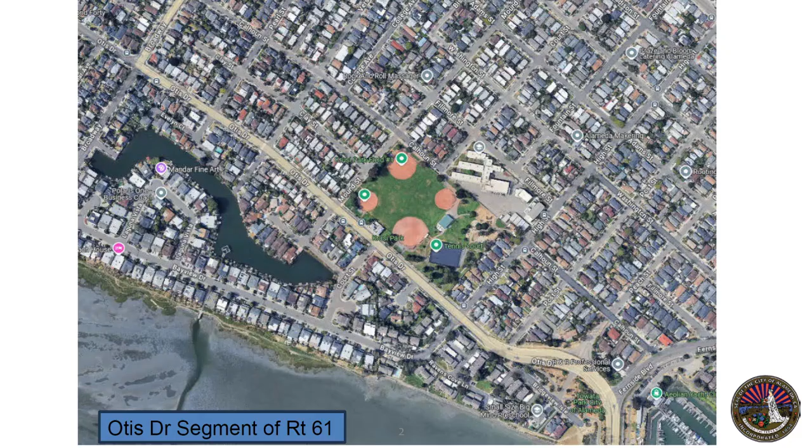It's a 4-lane roadway with uncontrolled crossings at key pedestrian and bicyclist access points. In the city of Alameda street classifications, it is a neighborhood connector, like an arterial. It's a transit route and a truck route. Caltrans found with their study that it has very high auto volumes, higher than other neighborhood connector streets in Alameda. It's a high injury corridor in the City of Alameda Vision Zero Action Plan.

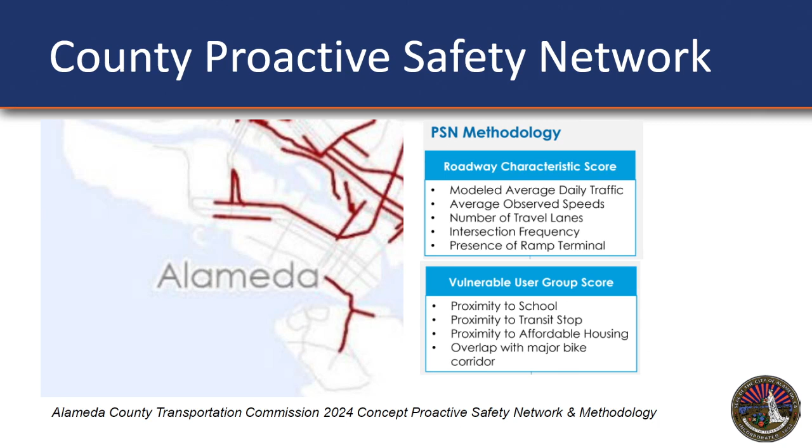It is on the Alameda County Transportation Commission's new proactive safety network, which is a network of streets where, quote, vulnerable users may be exposed to roadway conditions associated with fatal and severe injury collisions. They used roadway characteristics and land use characteristics to identify whether vulnerable users are present. Both this segment of Otis and Doolittle are on this network.

The active transportation plan for the city of Alameda has 2 neighborhood greenway connections on this portion of Otis, including a crossing at Mound Street. That neighborhood greenway will connect the southern part of the city and a neighborhood area across to Krusi Park and Otis Elementary, and then going further north on the Versailles neighborhood greenway.

And then Bayview Drive is also slated to be a neighborhood greenway in the 2030 backbone network. So we're looking at trying to connect Bayview and Otis heading east toward the bike bridge, the Bay Farm Island bike bridge.

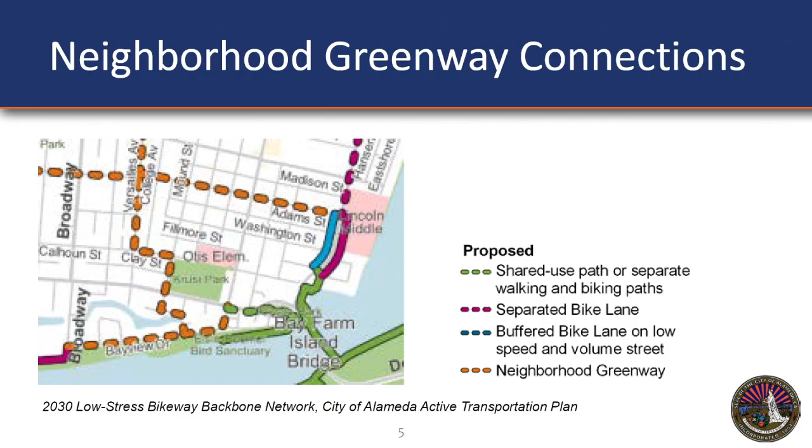So just a few city highlights for our takes on these projects before Ron takes over. For the CAPM maintenance project, Caltrans will tell us more about some pedestrian safety improvements at a few key intersections, and we really appreciate that. We also wanted to highlight that they included significant bikeway improvements on Doolittle Drive, which we are happy to see as well. And then the future road diet project is slated to be programmed in 2028 to start work.

I wanted to mention that the city has recommended studying a few specific design concept alternatives, not just one, and one of them is not necessarily a road diet, because we do see high auto volumes here.

We want to think creatively about how to address that while addressing the significant pedestrian and bicyclist safety and connectivity concerns that we have. Our current city priorities are safety for pedestrians and bicyclists crossing Otis Drive, and having a widened sidewalk and path east of Bayview Drive for this project.

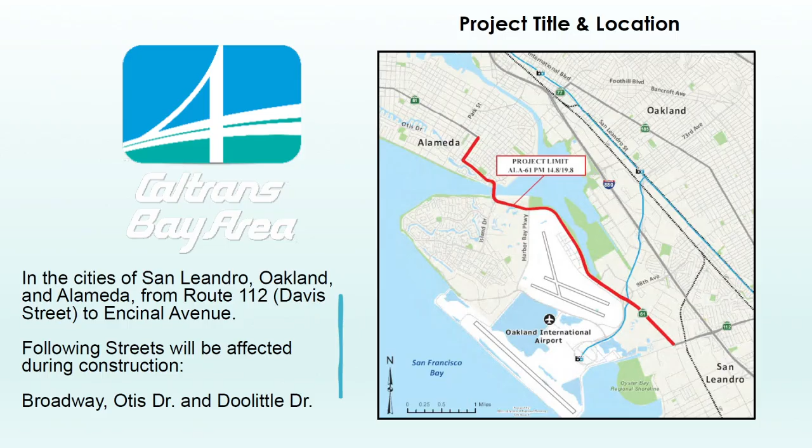The purpose of the project is to preserve and extend the life of the existing pavement, improve ride quality, and enhance traffic safety within the corridor. The scope includes pavement rehabilitation, drainage system rehabilitation, guardrail, and curb ramp upgrades.

The project is first and foremost a pavement preservation project. The purpose is to repair the pavement. The further these improvements are delayed, the more damage will occur and the more extensive repairs will be needed at higher cost. So it's important that the work proceed in as expeditious a manner as possible.

The project does not change the lane configurations. The number of traffic lanes remains the same before and after the project. The project does not add any roadway capacity, nor does it reduce roadway capacity. Again, the purpose of the project is to fix the pavement.

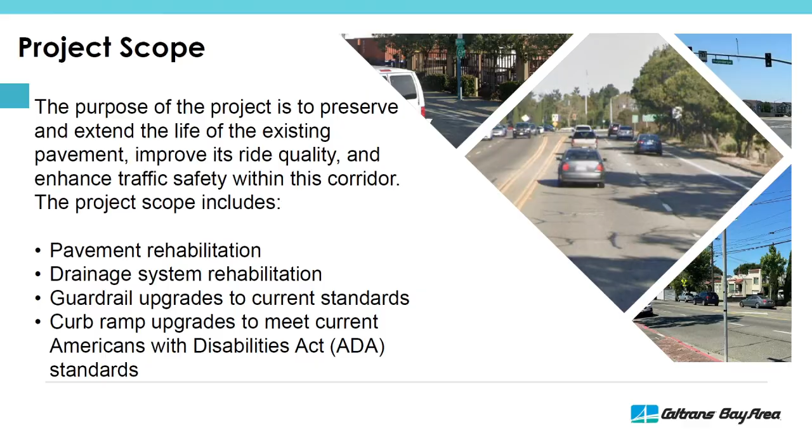The pavement design life will be about 10 years of rehabilitation, essentially to repair failed areas as well as resurface the entire road. We would grind off about 3 inches of pavement and replace 3 inches of pavement.

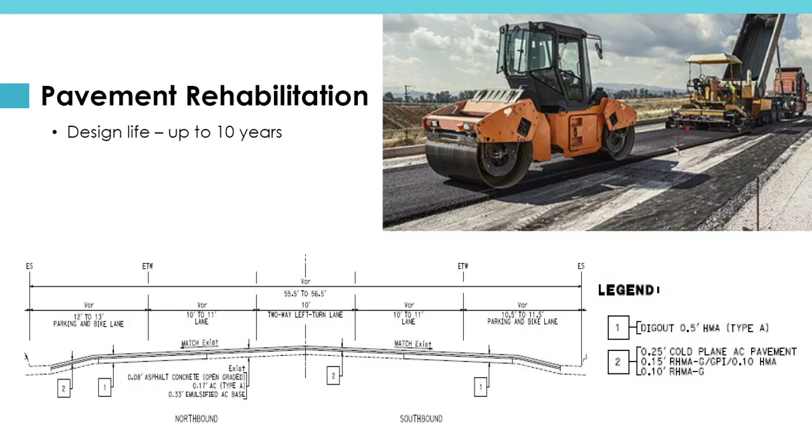As part of this pavement preservation project, we're incorporating complete streets elements, such as bike and pedestrian safety improvements where feasible. The first revision, based on the feedback we received, is to add median refuge islands in addition to the already proposed RRFBs, or rapid rectangular flashing beacons, safety lighting, and high visibility striping at the Mound and Versailles crosswalks at Otis Drive.

The second revision is to add curb bulb-outs at Mound Street to shorten the crossing distance for bikes and pedestrians.

Other features of the project include additional signs, roadside delineators, guardrail delineators, and enhanced high visibility striping throughout the entire 5-mile project length, as well as upgraded accessible pedestrian signal heads and safety lighting where feasible.

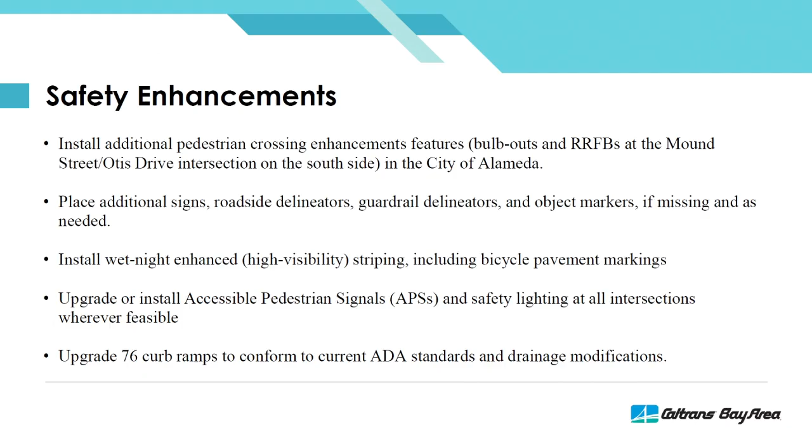The third revision, added based on feedback we've received, is to install Class 4 bike lanes for most of Doolittle Drive, covering from Route 112 at Davis Street in San Leandro all the way to Island Drive in Alameda. It's not entirely Class 4, but most of it is, and in areas that aren't, there's a Class 1 bike lane serving as a replacement.

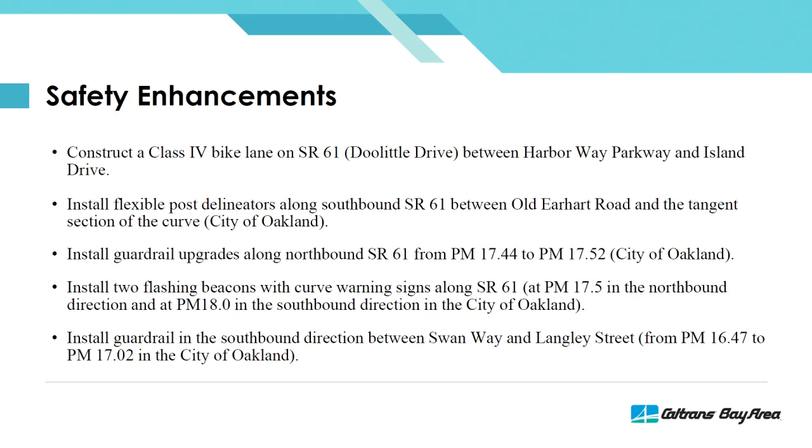In addition, the project includes other safety improvements such as flexible post delineators, guardrail upgrades, flashing beacons with curve warning signs, and other guardrail upgrades in the city of Oakland.

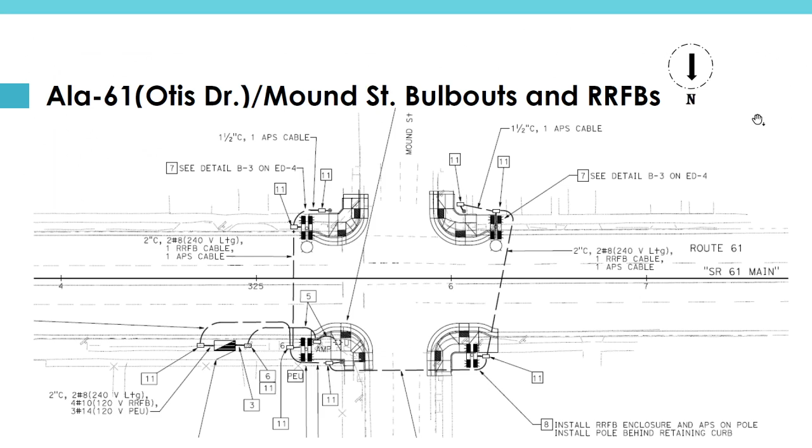Oh, this is the other presentation. Do we have the one I emailed? A new one? Try going to the next slide. I think I noticed this—okay, new one. Or can't go forward. Yes, this is the right one.

I had an example of a median refuge island, but I don't know if we still have that.

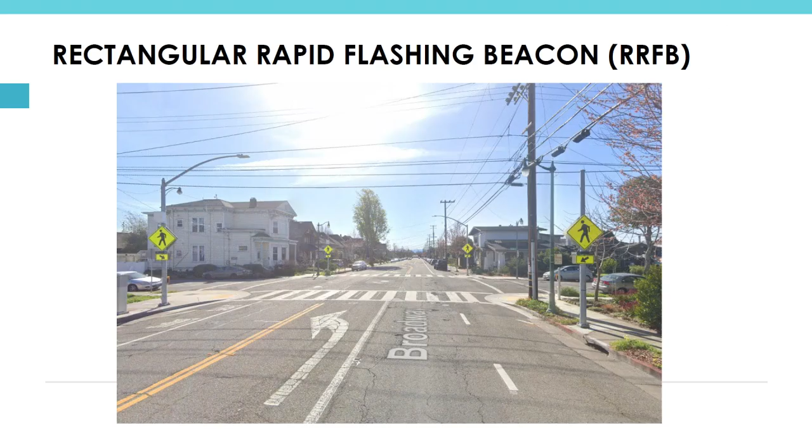I'm going to change the order a little bit here, starting backwards. So starting at Harbor Bay Parkway, and to the right is Island Drive. This is a Class 4 bike lane that starts at Harbor Bay and goes all the way to Island Drive as we continue further east. And then at that point it stops.

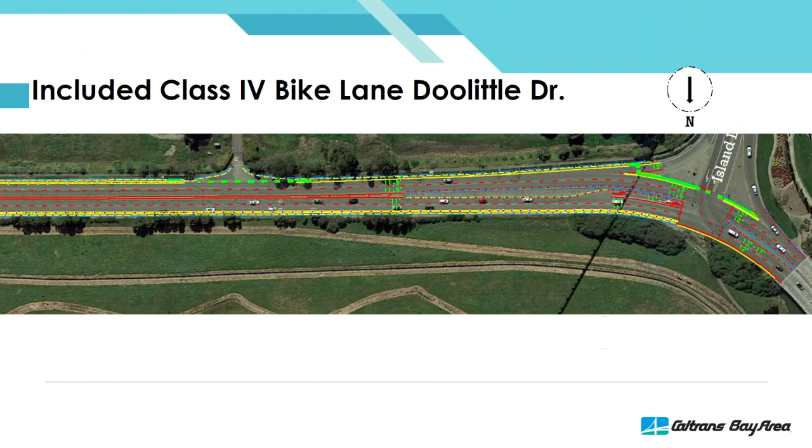Most cyclists would use the pedestrian bridge to cross over, continuing on over the pedestrian bridge at Fernside. The striping will be essentially the same as it is now. It'll just be refreshed after the pavement is resurfaced.

However, at this intersection here, this is Bayview Drive, and this is High Street down here. So at this location, there'll be curb bulb-outs into Bayview to reduce this crossing distance. That's one of the additions we're adding as a result of the feedback we've received.

Continuing further on, it's hard to see, but I think this is Mound right here. Yeah, Mound, and this is Versailles. So this is the area we would have a median refuge here, a median refuge here, and a median refuge here, and one more over here. Each of those will have an RRFB to warn motorists when a pedestrian's in the crosswalk, as well as street lights.

Ron, I think I have found the new presentation. Would you like us to switch over? Okay, sure. Apologies for that. No problem. Lots of moving pieces.

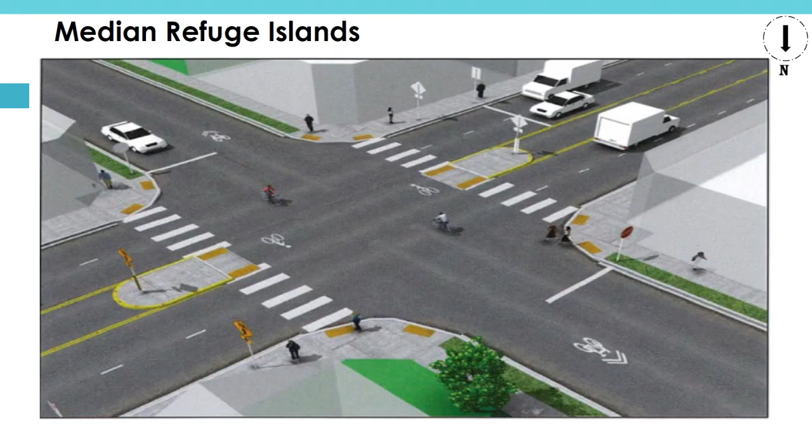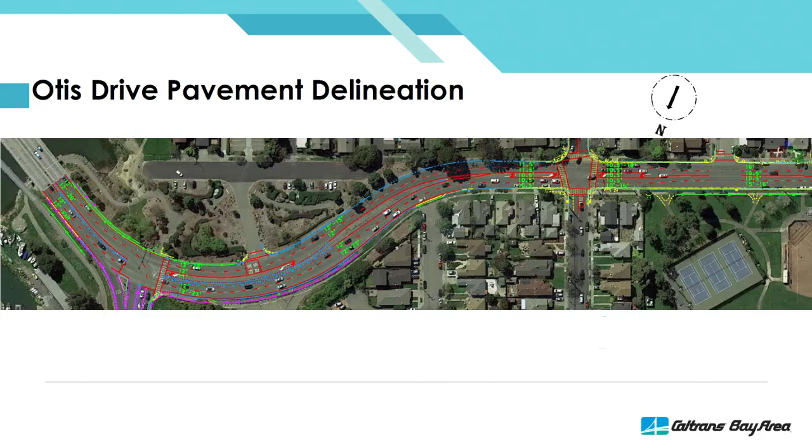And this is the same, there's no change in this picture from Harbor Bay to Island Drive and to Bayview. And as I was mentioning, at Mound and Versailles, we would be placing the median refuge islands here, here, here, and here. Our concern was truck turning.

We may need to have a restriction for vehicles longer than 40 feet in length as they turn left from, say, Mound Street, to avoid clipping the pedestrian refuge area based on the vehicle length. So left turns here, left turns here, just to make sure that's safe. The same thing for Versailles, left turns.

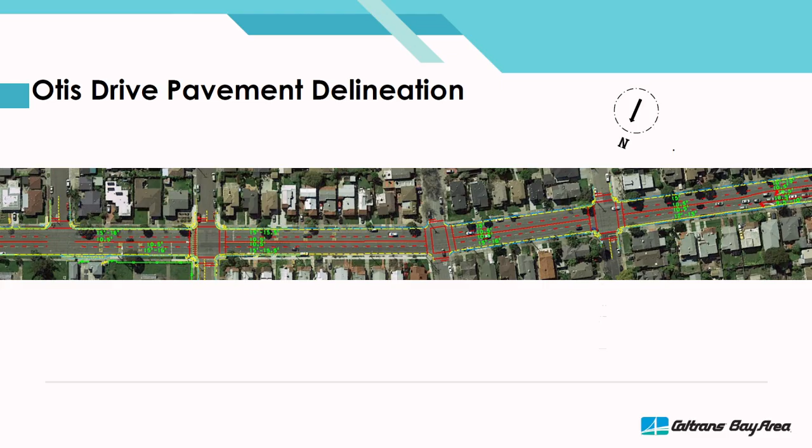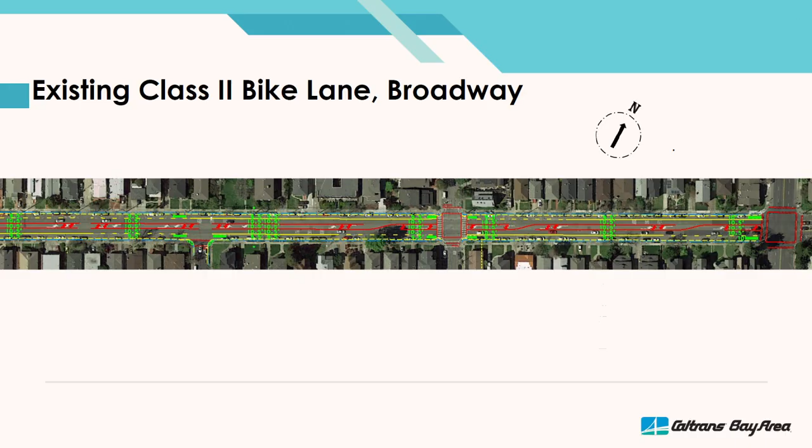And this is Otis here, and this main one is Broadway. On Broadway, the pavement will be restriped exactly as it is now, which features 1 lane in each direction, a 2-way turning lane, and Class 2 bike lanes. And this is the end at Encinal, right here.

So the project funding was allocated by the CTC in mid-May, and we're on target to advertise the contract for bids. We anticipate construction award of the contract by September, and construction would start sometime in January 2026 and end in approximately April 2027.

We'll be providing outreach to the public as we get closer to the beginning of construction, and examples of that would include press releases or a newsletter and a project website that details lane closure information.

The project is funded out of the State Highway Operations and Protection Program, otherwise known as the SHOPP. Total cost of about $23 million.

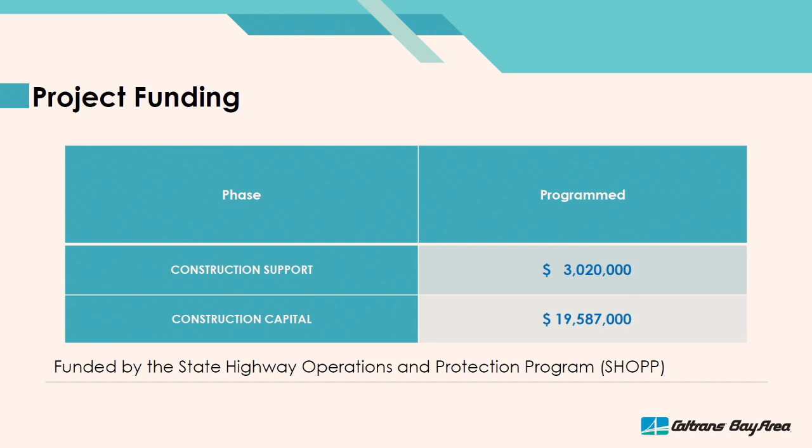As I mentioned earlier, the project is implementing as much bike and pedestrian safety improvements as is feasible for this type of pavement preservation project. This includes RRFBs with lighting, median refuge islands, curb bulb outs, and Class 4 bike lanes.

That's primarily because of the high traffic volumes on Otis Drive now. Reducing the lanes from 4 lanes to 2 lanes, essentially losing the capacity, would shift traffic to other streets. It would likely require removal of parking on one side of Otis.

There are several possible alternatives and roadway configurations that could be done. All of this requires a longer public engagement process and environmental process, along with limited funding and funding deadlines.

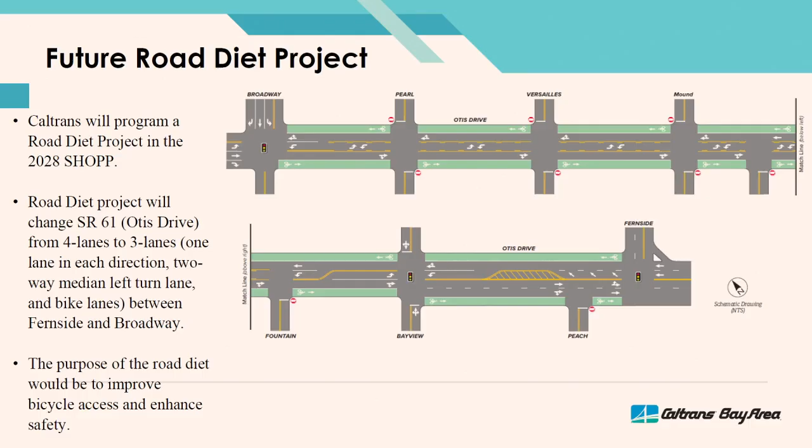And with that, I'd be happy to take any questions.

Thank you, Ron. Any clarifying questions of fact about the presentation before we get into discussion?

Commissioners? Commissioner Abrams. Well, first, I just want to say thank you for both of you for coming back here and presenting this. We know Caltrans Bay Area District covers 9 counties, millions of people, so thank you for the attention to the city.

I only had one clarifying question here, because I just want to be upfront and say that final slide, I think, raises lots of reactions around here, and I know Lisa had hinted that the city wanted to put some specific options on the table for this future study. I don't think that's the main focus of our conversation tonight. If I could just ask Lisa if you wanted to very briefly share the city's proposed options, just so that members of the public seeing that slide can think of that as one of a range of possibilities, even if it's kind of going beyond tonight's conversation.

So actually, if we're going to do that, that's fine, but we should do it during discussion, since we should focus. Clarifying questions should be specifically on what was presented here today, and then we can certainly move to that as part of our discussion. Any other clarifying questions of fact on the current presentation? Can I rephrase that as a clarifying question, Mr. Kim? Of course. Please, let's move to discussion.